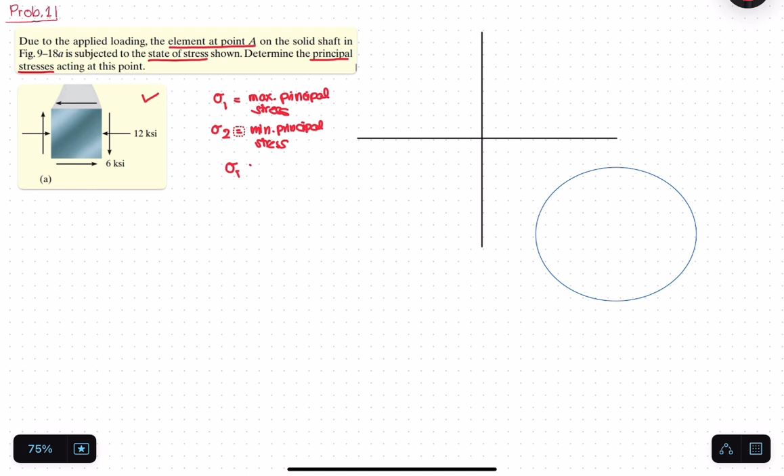Meron tayong maximum principal stress that is denoted by sigma 1. So, maximum principal stress. And then yung sigma 2 naman is minimum principal stress. Okay? So, always our sigma 1 is greater than sigma 2. Okay, so ito yung ating state of stress.

As you can see, this is our x direction, this is our y direction. So, sa ating positive x face, ang exert na normal force, normal stress is 12 ksi, and that is compression. So, bale, kung kunin natin yung points na dalawa, at the positive x face, so, ang coordinates na meron tayo is negative 12 kasi compression yung normal stress.

And then yung shear natin, as you can see, pag ganito yung direction, so it tends to produce a clockwise na moment. And in that case, your shear there, your shearing stress there is positive, diba? So, negative 12 comma 6.

And then, yung sa y-face naman, dito sa y-face natin, as you can see, wala tayong normal stress. So, 0 yan. But, meron tayong shearing stress that tends to produce a counterclockwise moment. So, that is, the value is also 6, pero negative siya. Kasi counterclockwise yung ating rotation na nabubuo ng shearing stress na yan.

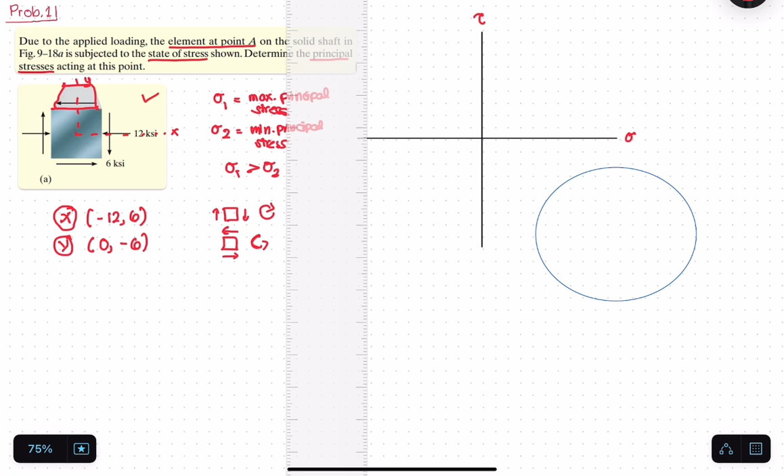So, negative 6. So, what we will do, i-draw natin yung Mohr circle. So, we have here our sigma axis and our tau axis. So, let's plot yung first kay negative 12 and then yung negative 12, 6. So, negative 12, 6. So, let's say, saan ba ang ating negative 12?

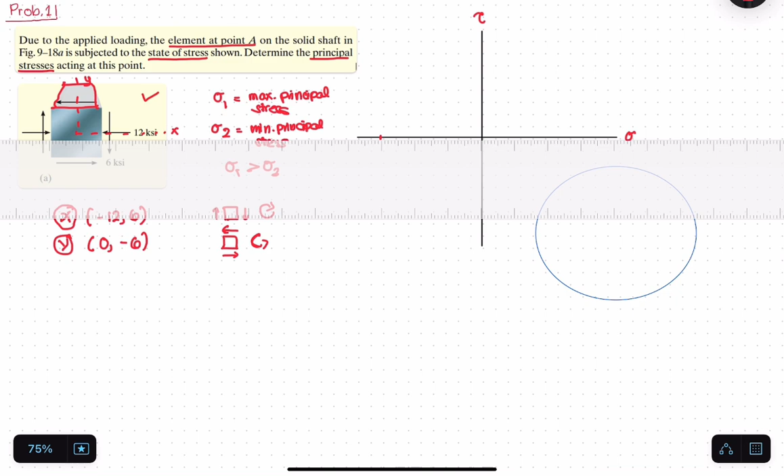Let's say, 2, 4, 6, 8, 10, 12. Let's say, nandito ang ating negative 12. Then, ang ating 6. Positive 6 and negative 6. 2, 4, 6. Positive 6 yan. 2, 4, 6 naman dito, negative 6.

Okay? So, kung i-plot natin yung etong x is negative 12 tapos 6. Bale, somewhere here. Right? So, let's we call this one as our x. And then, yung isa naman, 0, negative 6. So, nandito siya. So, this is our y.

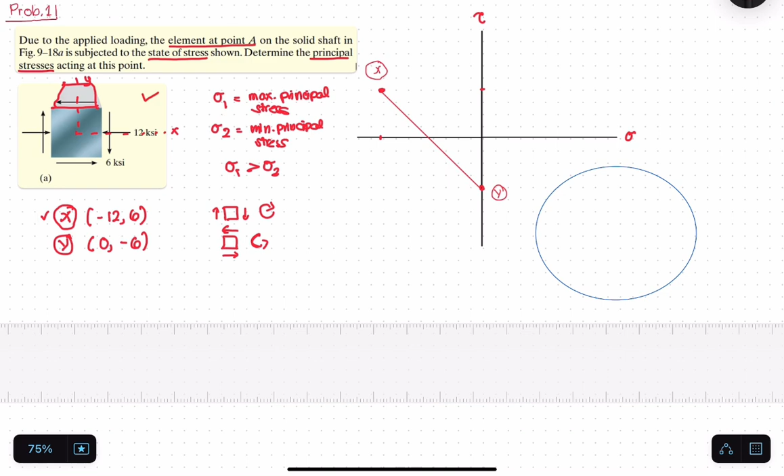So, y. Okay. Then, i-connect natin yung dalawang points natin. This will be our diameter ng ating circle, and kung saan siya nag-touch sa ating sigma axis, yun yung ating center ng circle. Okay, so I have here my circle. I-adjust ko lang siya para sumakto sa given.

Okay, so yan ang ating Mohr circle. So if i-drawing natin yung mga distances ng coordinates natin from here to here, remember this is 6, right? Six yan. Bale, hanggang dyan 6. And then, dito rin, mula dyan hanggang dito, 6. And then, from the tau na 0 hanggang sa point X, we have here negative 12.

And then, yan. So, remember, if this is the diameter, itong line connecting point X and point Y, this should be our radius and our radius. So, pwede tayong makabuo dito ng triangle, and then another similar triangle with the angle that is equal, yung angle dito at saka angle dyan.

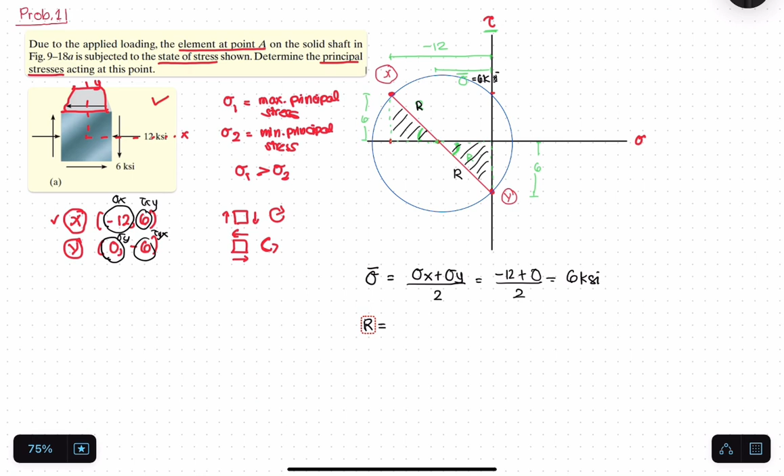Another thing we're solving is the radius of the circle. To get our radius, we can analyze either this triangle or that triangle, with R here and R here. Let's look at this one. Our R, using the Pythagorean theorem, is the square root of the sum of the squares of the legs. So 6 squared plus this other leg. But how about this one? What's its value?

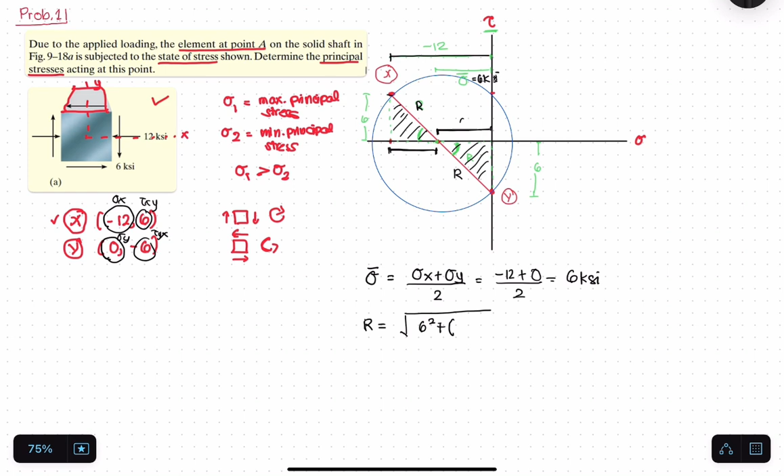We have 12, so we just subtract this from here to here, which becomes equal to this. And we know that this distance is our sigma bar, which is 6. So the other leg will be 12 minus 6, squared. And this equals 8.49 KSI.

Now that we have R, let's go back to what's being asked, the principal stresses. On our Mohr circle, where are the principal stresses? Again, principal stresses are the stress acting on the principal plane, where the principal plane feels no shearing stress. Where is that on our Mohr circle? It's actually these points - first this one, and second, let me change the color - this one. At these points, our tau is 0, and the only value it has is sigma. So which is bigger, the point on the right or the point on the left? Of course, the point on the right. So this is our sigma 1, maximum principal stress, and this is our minimum principal stress.

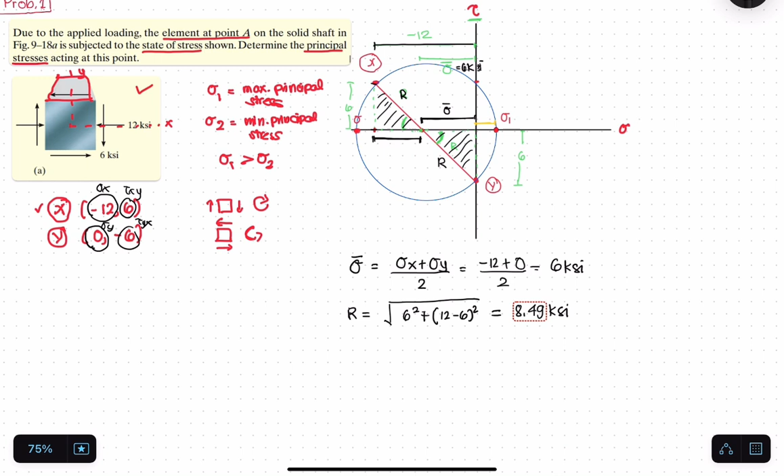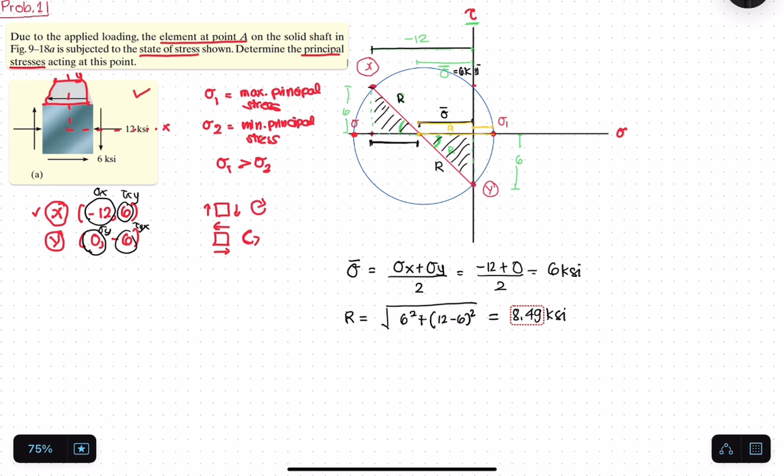So how do we do that? Look at this - going from our center to sigma 1, that distance equals R, remember? So we take that R and subtract our sigma bar, and we get sigma 1. In equation: sigma 1 equals R minus sigma bar. Our R is 8.49, minus sigma of 6. So 8.49 minus 6, that equals 2.49 KSI. So that's our sigma 1.

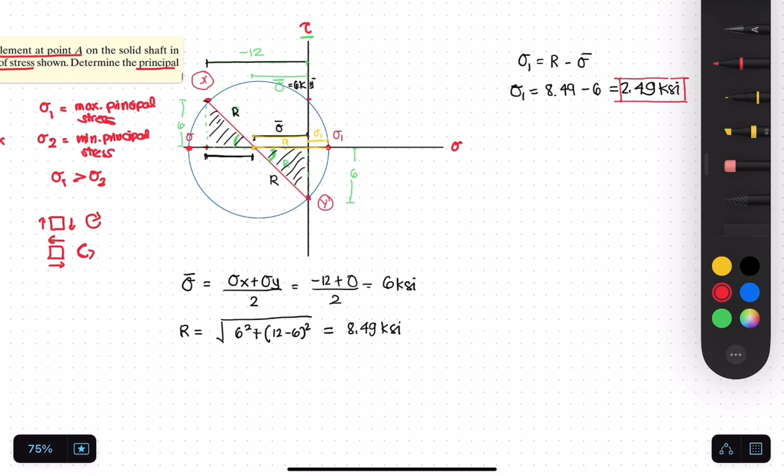Now how about sigma 2? How do we get sigma 2? Again we analyze - this is sigma 2. Where does sigma 2 come from? From our tau, going to that point, right? So how do we get sigma 2? Based on the figure, it's from here to here. That's 6, or with the appropriate sign, that's negative 6 since it's to the left of 0. So from here to here is negative 6. Then we add this, which is also the radius, but negative, so negative R, and that will equal sigma 2.

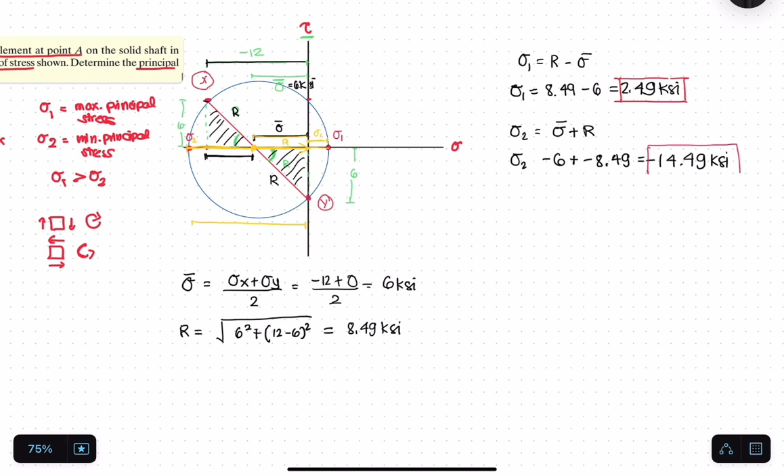So sigma 2 equals sigma bar plus R, but we put negative signs. Our sigma bar is negative 6, and our R is negative 8.49. So you get negative 14.49 KSI. So this is our minimum principal stress, sigma 2.

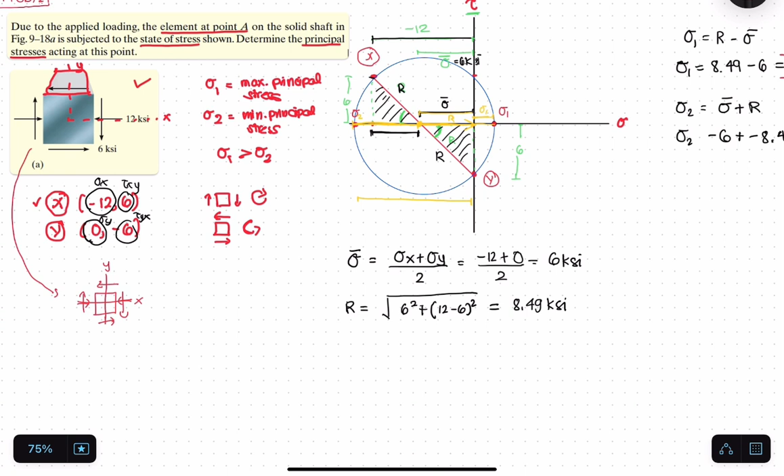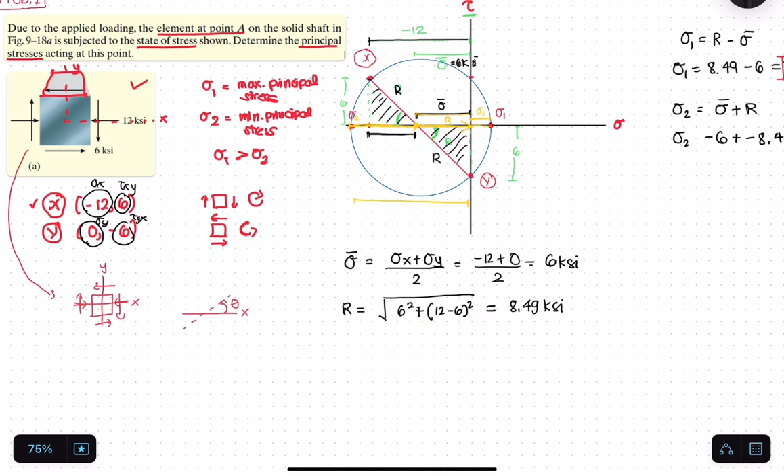Now there's something missing. Aside from getting the principal stresses, let's also find at what angle from the x-axis these principal stresses act. This is the original state of stress figure - this is the element, this is positive x, positive y, and this is the state of stress, already drawn. Now our principal stress, from the x-axis, how many degrees is it? Let's say from here, what's this theta? So we can see where our principal stresses actually occur or are present.

Remember the relationship: the theta on our plane, when drawn on the Mohr circle, becomes 2 theta, and vice versa - the 2 theta on the Mohr circle becomes just theta on the state of stress figure. So we just divide by 2. Usually, the value of theta we take is the one counterclockwise from the x-axis.

So, ito yung x, papunta doon. So, in our Mohr circle, diba ito ang ating point x? Okay, yan yung point x natin. So, galing sa point na yan, pumunta tayo sa plane kung saan principal plane siya, o di kaya pumunta tayo sa plane kung saan present yung isang principal stress. So, from here, ito yung point na to, sa side na yan, diba, ito siya, point x.

So, kung yung plane na kukontain ng isang principal stress, ito siya, isa yan to. Diba? So, from here, punta tayo dito. Okay, tawagin natin tong angle na to as 2 theta p. Okay, 2 theta p. And since pumunta tayo sa principal na stress na yung sigma 2, yung minimum, so lagay ko dito ng 2, 2 theta p2. So, hanapin natin ano yung theta p2 na yan. So, gawan lang natin ng triangle and then isolve natin yung triangle using trigonometry.

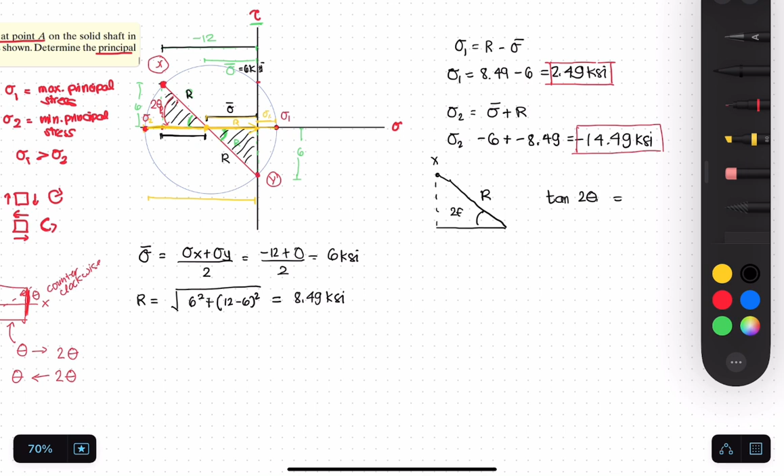2 theta 2 na lang, similar sa book, so 2 theta 2. Wala na yung P2, yung P. So 2 theta 2, 2 theta 2. So, the opposite is etong value na to, which is we know na 6 naman yan. So, 6 over our adjacent. So, ang adjacent natin, ito, diba that is what? That is just the,

ano to? Yan yung 12 minus 6. 12 minus 6 yan, no? Ito 12 no? Galing dyan, 12. Then, minusan natin ng sigma bar, we will get this one. Okay, so 12 minus 6. So, anong lalabas? 2 theta 2. 2 theta 2 is tan inverse of 6 over 12 minus 6. And from here, lalabas class na theta 2 is 22.5 degrees.

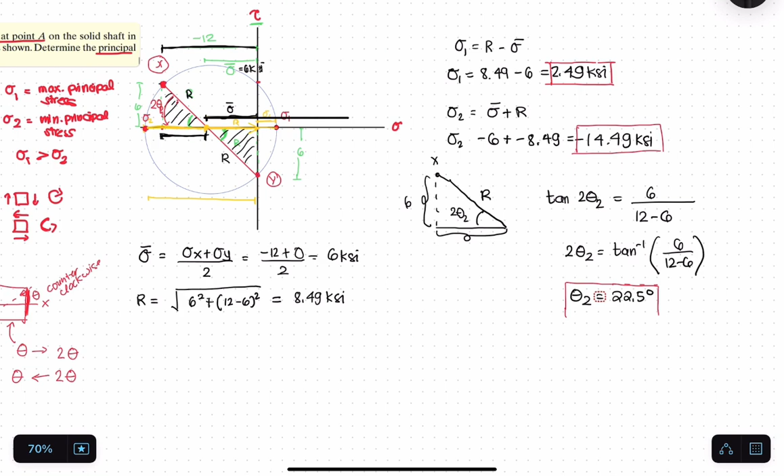Okay, so to finalize our answer, why not i-drawing natin yung state of stress na present, kung saan present ang ating mga principal stresses. So, since alam naman natin yung angle, we can now draw it, no? So, wait lang, let's use black for the original axis. Okay, ito yung original na XY. So, napag-alaman natin na yung principal stress minimum will be occurring at an angle 22.5 from the x-axis. So, 22.5 from the x-axis.

Tawagin natin tong x prime. Then, drawing tayo ng perpendicular na axis sa ating x prime. Yan. Okay, so tawagin natin y prime. And then, drawing na tayo ng element. So, this is our element.

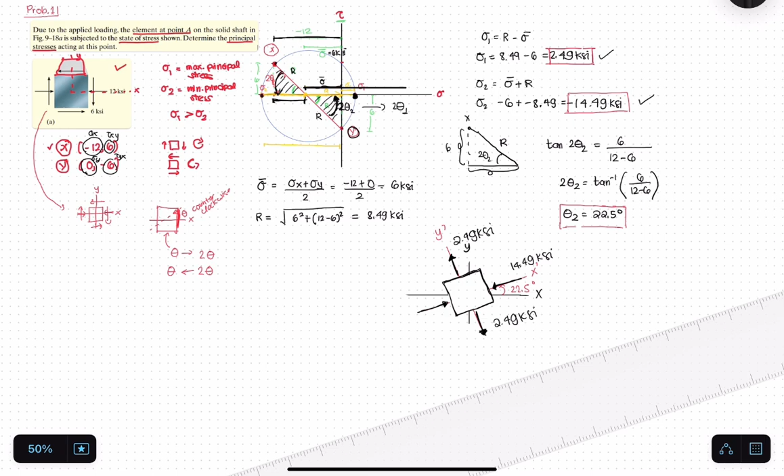So, after mong pag dumating dito, mag-move ng 2 theta 1, ano yung nadatnan natin na plane? Ano yung stress na meron dyan? Diba, sigma 1 lang? And ang value niya is positive. So, ang value ng sigma 1 is 2.49 tapos positive. So, i-drawing natin yung state of stress on the y face as away from the element, so 2.49 KSI. And then, similar dito, sa baba nga lang, so 2.49 KSI. So, this is our answer for problem number 1.